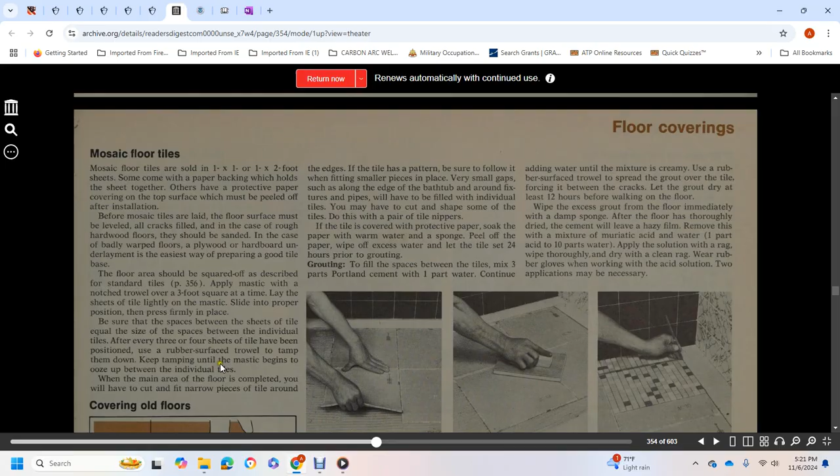Every 3 to 4 sheets of tile, once positioned, should be tamped with a rubber-surfaced trowel to tamp them down. Keep tamping the tile until the mastic begins to ooze up between the individual tiles.

If the tile is covered with protective paper, soak the paper with warm water and a sponge. Peel off the paper, wipe off excess water, and let the tile set 24 hours prior to grouting.

To fill the spaces between the tiles, mix 3 parts Portland cement with 1 part water, continuing to add water until the mixture is creamy. Using a rubber surface trowel, spread the grout over the tile and force it between the cracks. Let the grout dry at least 12 hours before walking on the floor.

Wipe excess grout from the floor immediately with a damp sponge. Once the floor is thoroughly dried, the cement may have a hazy film.

Remove this with a mixture of muriatic acid, 1 part, to 10 parts water. Apply the solution with a rag and wipe thoroughly dry with a clean rag. Wear rubber gloves while working with the acid solution. Two applications may be necessary.

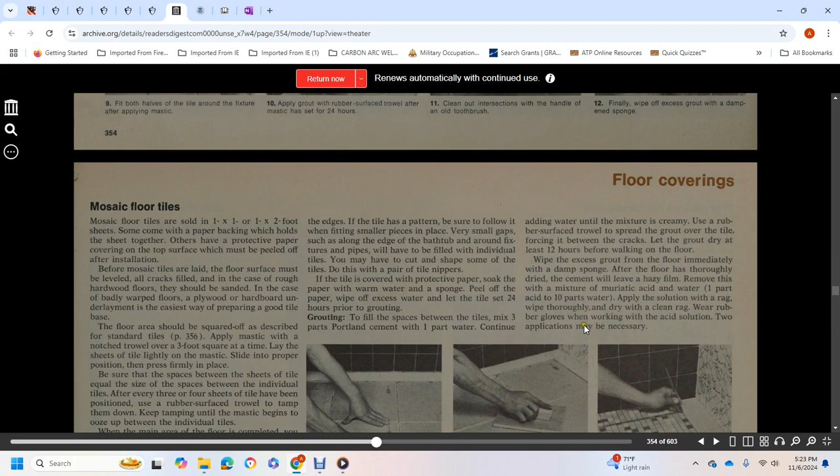Preparation of ceramic tile: lay ceramic tiles so they are square in relation to the doorway that is lined up. The tile runs squarely from the entry toward the back of the room. This is especially important with odd-shaped rooms. Mark a line on the floor at a right angle to the door, running from the center of the door to the back of the room.

Use a squared length of wood, divided into lengths as described in the wall tiling section, as a measuring stick. Floor tiles do not have a spacer lug, so you should allow about 1/16 of an inch gap between the tiles.

Start from the door jamb. First fold the measuring stick to divide the center line into the tile width. You may need to use cut tiles at the far wall, since full tiles rarely fit the length exactly. Mark the point at which the last full tile was laid.

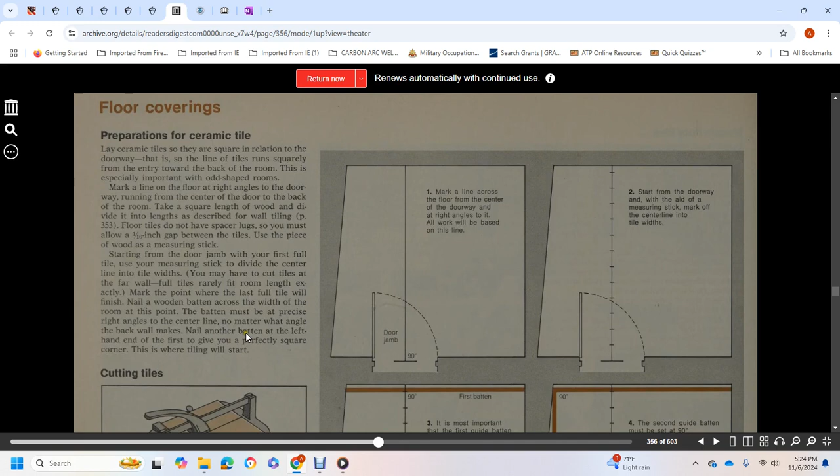Nail the wooden batten across the width of the room. At that point, the batten must be precise, at right angles to the center line. No matter what angle the back wall makes, nail another batten to the left-hand end of the first to give a perfect square corner. This is where the tiling will start.

Laying ceramic floor: ceramic floor tiles are made either as 4-inch squares at 3/8 of an inch thick, or 6-inch squares at 1/2 inch thick. They must have matte glazed surfaces. Unlike wall tiles, they don't have spacer lugs.

Wood floors are the best surface for them. Concrete or brick floors are generally unsuitable for ceramic tiles because they are rarely flat and must be accurately leveled. This leveling job is best left for a professional before tiles can be laid.

Make sure the floor is perfectly flat and firm. Nail down any loose boards and sand the surface if necessary. Very uneven, rough floors should be covered with a hardwood underlayment as another preliminary requirement. Sometimes adjustments will have to be made to the doors to compensate for the thickness of the tiles. Be sure the floor tile mastic lays properly.

Ceramic tile mastic is usually rubber-based and has the needed flexibility to allow movement while the tiles are being set. Apply the mastic according to the directions on the container, using a notched trowel to spread it over a 3-foot square area of floor.

In the corner where you had laid out the battens, press the tiles into the adhesive and insert 1/16 inch spacers between them. When you finish tiling the first section, scrape off the excess adhesive around the tiles, coat the next area, and continue this way until the main floor is complete.

If you find that the rows of tiles are getting closer together or farther apart, it could mean that your battens were not set at exactly a 90-degree angle. Manipulate the tiles so they are even; the flexible mastic permits some adjustment. If you cannot correct it, you will have to take them all up and start over, carefully repositioning all the battens at a correct 90-degree angle.

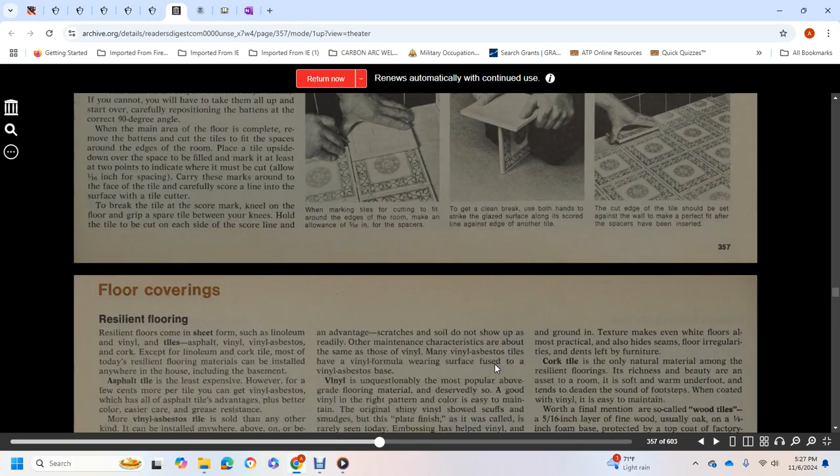Floor coverings, resilient flooring. Resilient flooring comes in sheet form and includes linoleum, vinyl tiles, asphalt tile, vinyl asbestos, and cork. Except for linoleum and cork tile, today's resilient floor tiles can be installed anywhere in the house, including the basement. Asphalt tile is the least expensive, with vinyl asbestos costing a few cents more.

Vinyl asbestos has advantages over asphalt tile, including more color options, easier care, and grease resistance. More vinyl asbestos tile is sold than any other kind, and it can be installed anywhere above or below grade. It does not require waxing or buffing to maintain its sheen.

Vinyl asbestos tiles are made with a mixture of vinyl resins, asbestos fiber, and colors. The gloss is less brilliant than pure vinyl, but this is an advantage since scratches do not show up. Other maintenance characteristics are relatively the same as other vinyl. Vinyl asbestos tiles have a vinyl formula wearing surface fused to the vinyl asbestos base.

Vinyl is unquestionably the most popular of the flooring materials, and deservedly so. A good vinyl in the right pattern and color is easy to maintain. The original shiny vinyl that showed scuffs and smudges, with a plate finish as it was called, is rarely seen today.

Embossing helps vinyl and other tile materials conceal wear marks, with carved, pitted, and fissured grain effects that do more than just look good; they're easier to maintain. Dirt lies loosely in the recesses instead of being walked on and ground in. The texture makes white floors almost practical, and also hides seams, flooring irregularities, and dents left by furniture.

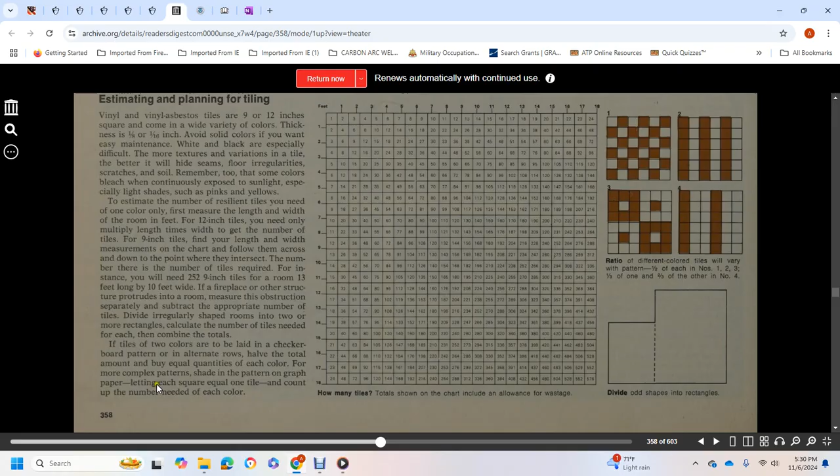If the tiles are of two colors arranged in a checkered pattern or alternate rows, halve the total amount and buy equal quantities of each color. For a more complex pattern, sketch the pattern on graph paper, letting each square equal one tile, and count up the number needed in each color.

Preparation for resilient floor tiling.

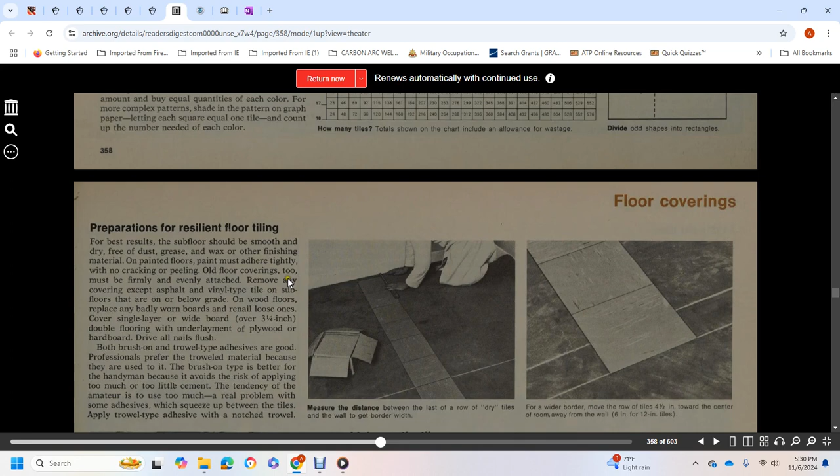For the best results, subfloors should be smooth and dry, free of grease and wax. finishing material. On painted floors, paint must adhere tightly, no cracking or peeling. Old floor covering must be firmly and evenly attached. Remove any loose covering.

Keep asphalt vinyl tile on subfloors that are below grade. On wood floors, replace any badly damaged boards and renail loose ones. Cover single layer wide board over 3 1/4 inches with double flooring. Underlayment of plywood or hardboard hardboard. Drive all nails flush.

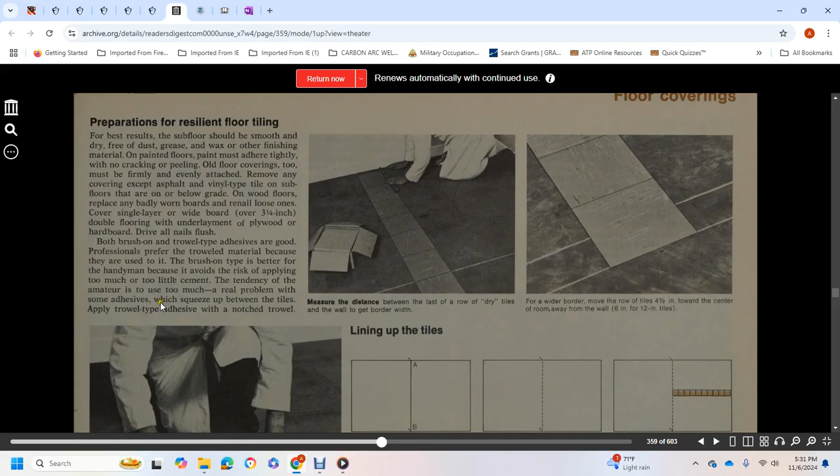Both brush and trowel type adhesive are good. Professionals prefer trowel material because they are used to it. Brush-on type is better for the handyman because it avoids the risk of applying too much or too little cement. The tendency of the amateur is to use too much, causing problems with adhesive squeezing up between the tiles. Apply trowel type adhesive with a notched trowel.

Laying the tiles: tile half of the room at a time. First, spread adhesive over a square yard of the floor on each side of the center line. Place the first two tiles at right angles, aligned with the chalk lines. Work outward on each side to form a pyramid pattern.

Lower the tiles into the adhesive. Do not slide them into place, as this forces the adhesive up. Lay marbleized or grain tiles so that the pattern of the adjacent tile runs in the opposite direction.

Continue spreading adhesive and laying tiles up to the borders. To cut the border tiles, place a dry tile exactly over the adjacent fixed tile, then place another tile on top, flush with the wall.

Score along the inner edge of the top tile, then break along the score so the tile will fit to the wall. Do the same when cutting tile against a door frame.

First, mark the tile where the cutting line starts, then move the tile without turning it to the other side of the door frame, against the other fixed tile. Draw lines at right angles that intersect the first, then cut along the lines up to the intersection with a sharp knife.

Treat more complicated shapes, like a threshold, the same way, using two separate measurements for each surface, with both tiles in position. In the example, the right edge tile is in the first position, with lines drawn on the tile for each surface, A, B, C, and D.

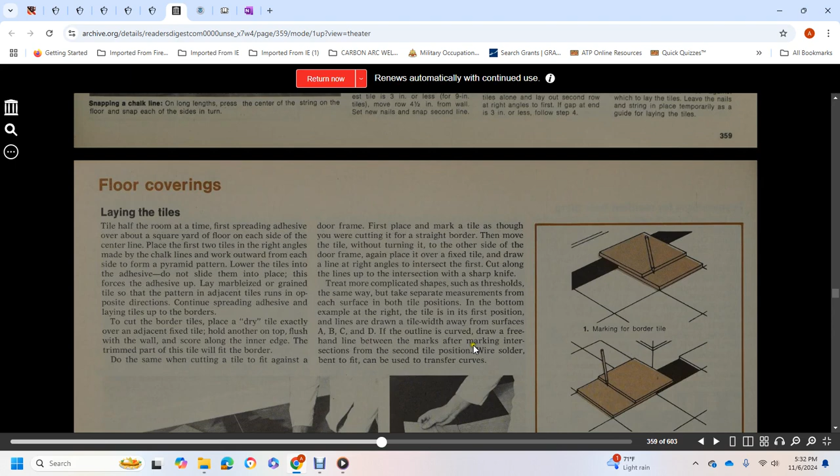If the outline is curved, draw a freehand line, then move the tile's marks after marking the intersection to the second tile position. A wire or solder bent to fit can also be used to transfer the shape.

How to lay sheet vinyl.

Standard sheet flooring is installed permanently with adhesive but is not generally recommended as a do-it-yourself material. Loosely laid vinyl flooring, however, is well within handyman skills.

Most cushion vinyls are available in 6, 9, or 12 foot widths, so seaming is needed only for rooms that are more than 12 feet wide. Match the pattern across the seam, with the second piece of material overlapping along the same edge.

Use the metal straight edge as a guide. Where both pieces of material overlap, a sharp knife is used. Keep the knife vertical, avoiding any leaning to the right or left. Remove the cut off pieces from both the top and bottom.

Next, lay back one piece of the flooring at the seam, drawing a pencil line along the edge of the second piece. Lay back the second piece and spread a 6-inch band of adhesive under the seam, centering on the pencil line.

If the back of the vinyl has been waxed, sand the area lightly. Use a vinyl cement recommended by the flooring manufacturer, then spread it with a notch trowel. Lay the vinyl sheeting onto the wet adhesive and wipe down with a damp cloth to ensure good contact with the adhesive.

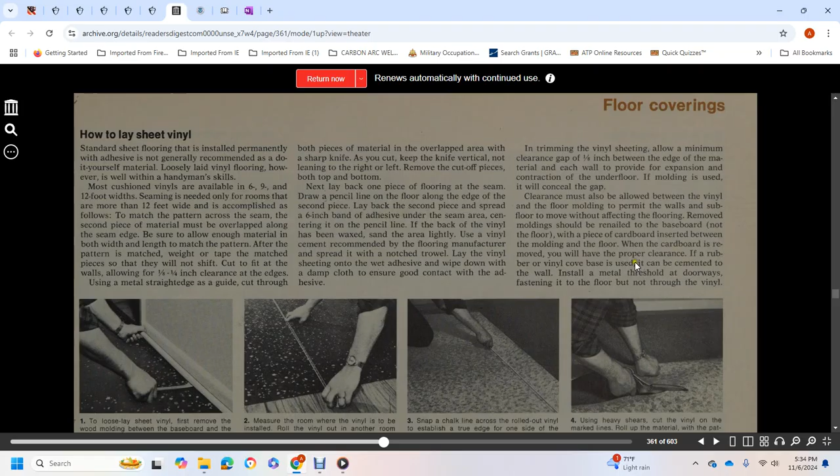Remove the molding and re-nail the baseboard, not into the floor. Place a piece of cardboard inserted between the molding and the floor; the cardboard is removed once you have proper clearance. Rubber vinyl cove base can be used and cemented to the wall.

How to lay a wood floor.

Wood floors are to be secured over the joists, even over concrete. A subfloor is usually used, however, for added strength many today use plywood nailed across the joists, generally covered with a layer of 15-pound asphalt saturated building felt, lapped at 3 inches.

The felt is held in place by the finished floor, typically tongue and groove strip board flooring, the kind most commonly used. It comes pre-finished or unfinished, and is usually laid lengthwise along the room. Take care when laying a wooden floor not to mar the wood, and when hammering, angle the nail at the tongue at a 45-degree angle.

Nail into the subfloor using 2.5-inch steel cut flooring nails. The choice depends on the thickness of the finished floor. Start nailing in the tongue approximately where the shoulder of the tongue comes out. To avoid splitting the tongue, use a nail set, countersinking it at least 1/4 inch or so.

If there's a subfloor, the nails need to go into the joists. Leave a gap of at least 1/4 inch at each side of the room.

Alright, how to lay a wood floor over concrete. A wood floor can be laid over concrete using 2x4 screeds, short lengths to which the flooring can be nailed, using random lengths of 18 to 48 inches of 2x6 or 2x8 pieces along the walls.

Screeds are set with mastic about 1/8 of an inch thick, spread over the whole floor. Adhesive is applied only under the screeds, spread 1/4 inch thick. Compression by the screeds causes it to spread further.

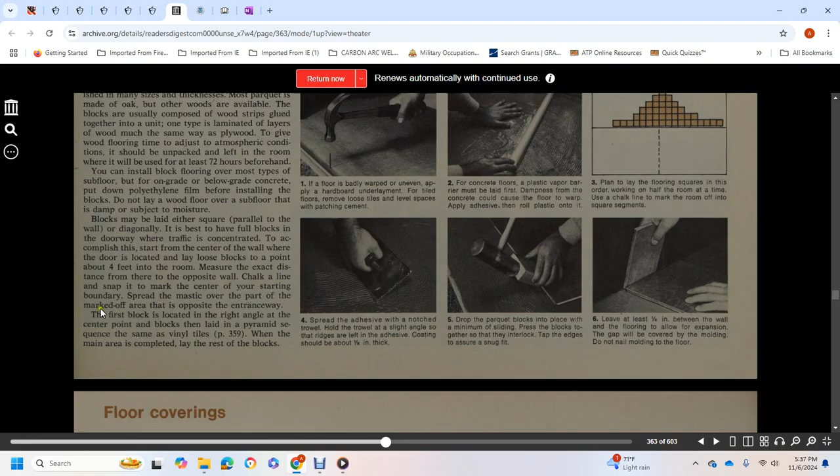Blocks may be laid either square parallel to the wall or diagonally. It's best to have full blocks in the doorway where traffic is concentrated. To accomplish this, start with the center wall where the door is located. Lay loose blocks to a point about 4 feet into the room. Measure the exact distance from the opposite wall, chalk a line and snap it. Mark the center of the starting boundary. Spread the mastic over the marked off area opposite the entranceway. Place the first block at a right angle with the center point, following a pyramid sequence, same as vinyl tiles.

Now, laying slate tiles. Slate tiles are particularly good for flooring because they are unaffected by water and dirt. They seldom need polishing, with occasional damp wiping usually sufficient. Slate tiles are like fine garden walking paths leading to front entrances.

Slate can be laid over sound wood, concrete, or composition floors. Loose boards should be nailed down tight. Clean up the areas to be tiled, removing all wax, grease, and loose paint. Lay tiles outdoors over a concrete base at least 4 inches thick. A dry run is advisable before laying the tiles.

Slate tiles are sold at masonry supply dealers, loose in packages, usually enough in a carton to cover 10 square feet. Tiles can be random colors, or you can specify one color and a thickness of 1/4 inch or 1/2 inch. Tiles can be in an irregular flagstone pattern or in rectangles, squares, or ashlar.

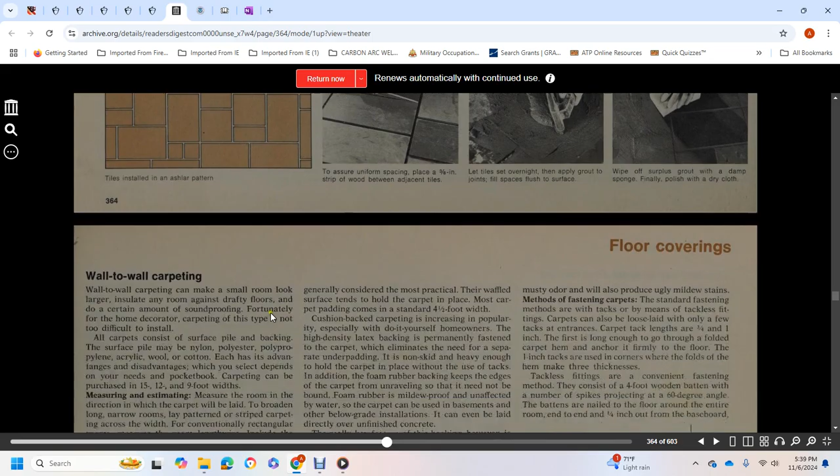Wall-to-wall carpeting can make a small room look larger, insulate any room with drafty floors, and provide a certain amount of soundproofing. Fortunately, in home decorating, this type of carpeting is not too difficult to install. All carpets consist of a surface pile with backing; the surface pile can be nylon, polyester, polypropylene, acrylic, wool, or cotton. Each has advantages and disadvantages, and your selection depends on your needs and pocketbook.

Carpeting can be purchased in 15, 12, or 9 foot widths. To measure and estimate, measure the room in the direction the carpet will be laid - to broaden long, narrow rooms, lay patterned or striped of carpeting across the width. For a conventional rectangular room, measure the room lengthwise, including the full width of door frames, and extend the carpet slightly into the adjoining room.

Most wall-to-wall carpeting is priced by the square yard. Determine how many square yards you need by multiplying the length and width of the room in feet, then dividing the result by 9.

Choosing a padding is essential, except for so-called one-piece cushion-backed carpeting with built-in underlay padding. Good carpet insulation prolongs the life of the carpeting, increases its soundproofing capacity, and adds underfoot comfort. The most common types of carpet padding are latex rubber sponge, rubber foam, soft and hard vinyl foams, and felted cushion made either entirely of animal hair or a combination of hair and jute. Of these, latex vinyl foams are generally considered most practical, with a waffle surface that tends to hold the carpet in place.

Most carpet padding comes in a standard 4.5 foot width. Cushion-backed carpeting is increasing in popularity, especially with do-it-yourself homeowners. Its latex backing is permanently fastened to the carpet, eliminating the need for separate underpadding, and is non-skidding and heavy enough to hold the carpet in place. The foam rubber backing also keeps the edges of the carpet from unraveling, so it need not be bound.

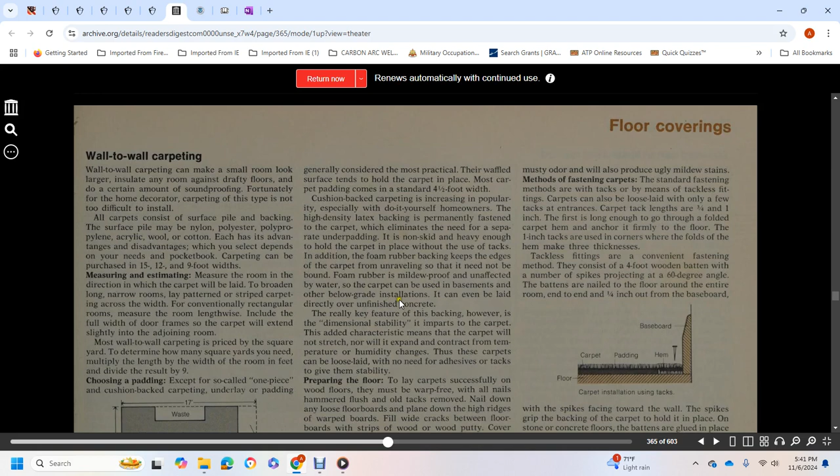Foam rubbering is mildew-proof and unaffected by water, so the carpet can be used in basements or other below-grade installations, even laid directly over unfinished concrete. The real key feature of this backing, however, is dimensional stability. With this characteristic, the carpet will not stretch, nor will it expand or contract with temperature or humidity changes. These carpets can be loose-laid, needing no adhesive or tacks to give them stability.

Preparing the floor: to lay carpet successfully over a wooden floor, it must be warp-free, with all nails hammered flush and old tacks removed. Loose floorboards should be nailed down, and high ridges or warped boards should be planed down. Fill wide cracks between floorboards with wood strips and wood putty. Cover floors with warps or cracks beyond reasonable repair with hardboard or plywood.

Stone or concrete floors with surface ridges or cracks should be treated beforehand with floor leveling compound in order to reduce carpet wear. Liquid compounds are usually useful for sealing and surfacing dusty, powdery floors - a thin layer of compound is floated over the floor to keep dust from working its way up into the underlay and carpet pile.

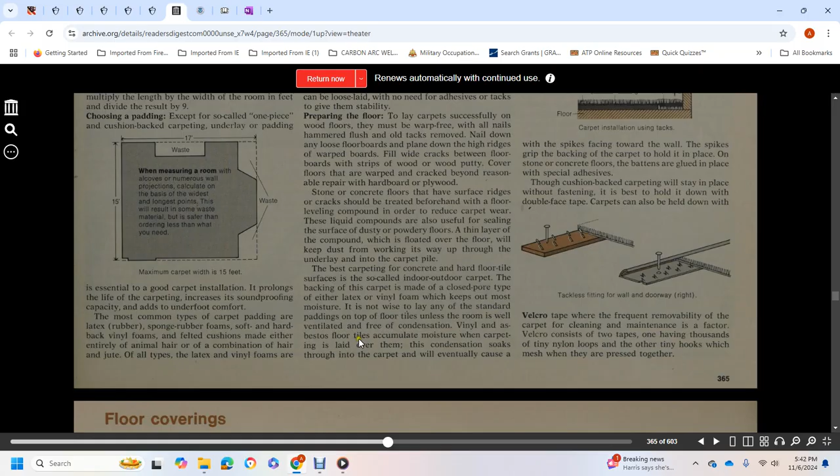Best carpeting for a concrete hard floor tile surface is so-called indoor-outdoor carpet. The backing is made with a closed pore type, either latex or vinyl foam, which keeps out moisture. It's not wise to lay standard padding on floor tiles unless the room is well ventilated and free of condensation. Vinyl asbestos floor tiles accumulate moisture when carpeting is laid over them. The condensation soaks through the carpet and will eventually cause musty odor and ugly mildew stains.

Methods to fasten carpet cover the standard fastening methods: tacks and tackless fittings made with tackless fittings. Carpeting can also be loose laid with only a few tacks at the entrance. Carpet tack lengths are 3/4 inch and 1 inch. The first length should be long enough to hold the folded carpet hem and anchor it firmly in place to the floor. 1 inch tacks are used in the corners where the folds of the hem make 3 thicknesses.

The tackless fittings, a convenient fastening method, consist of a 4-foot wooden batten with a number of spikes at a 60-degree angle. The battens are nailed to the floor around the entire room, 1/4 inch out from the baseboard, with the spikes facing toward the wall. The spikes grip the backing of the carpet to hold it in place. On stone or concrete floors, battens are glued in place with special adhesive.

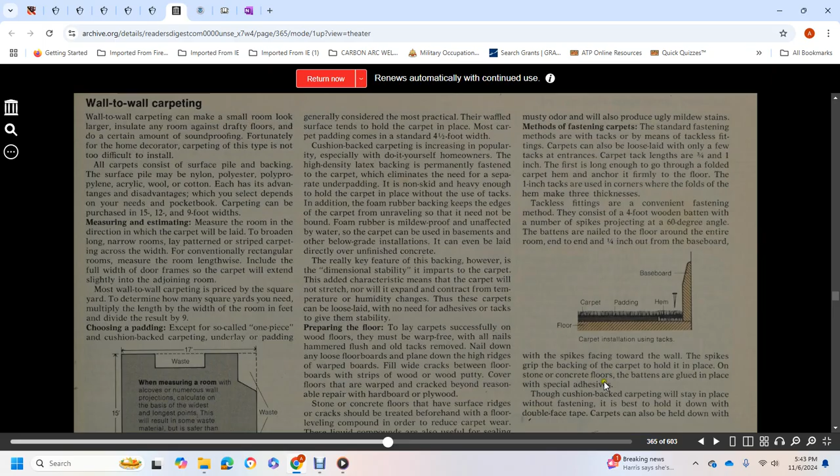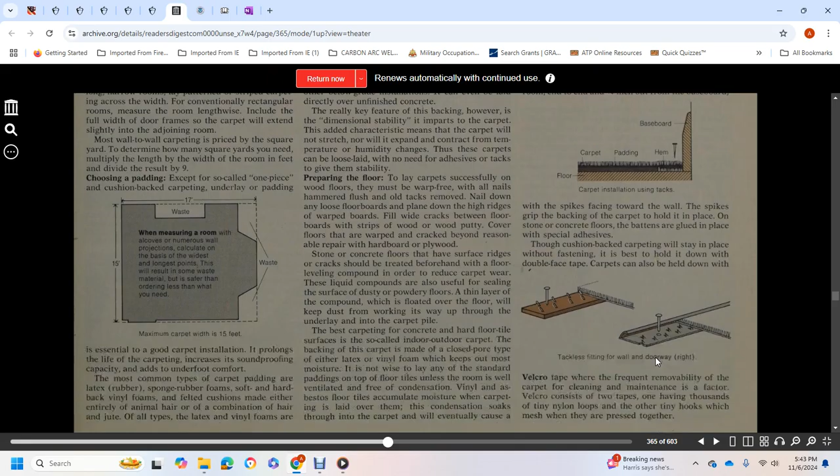Cushion back carpeting stays in place without fastening, and it's best to hold it down with double-faced tape. Carpets can also be held with Velcro tape for frequent removability of the carpet. The Velcro cleaning maintenance system consists of two tapes having thousands of tiny nylon loops and other tiny hooks which mesh together when pressed.

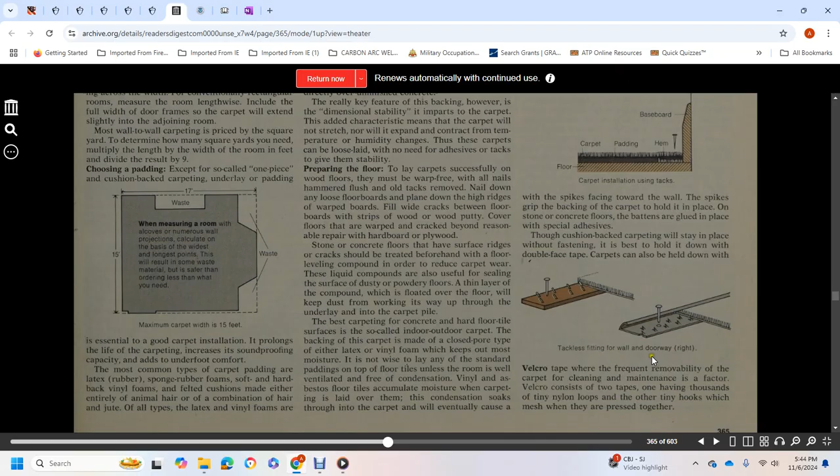This shows the tackless fitting at the wall doorway, and shows the carpet installation, floor carpet padding, hem, and baseboard.

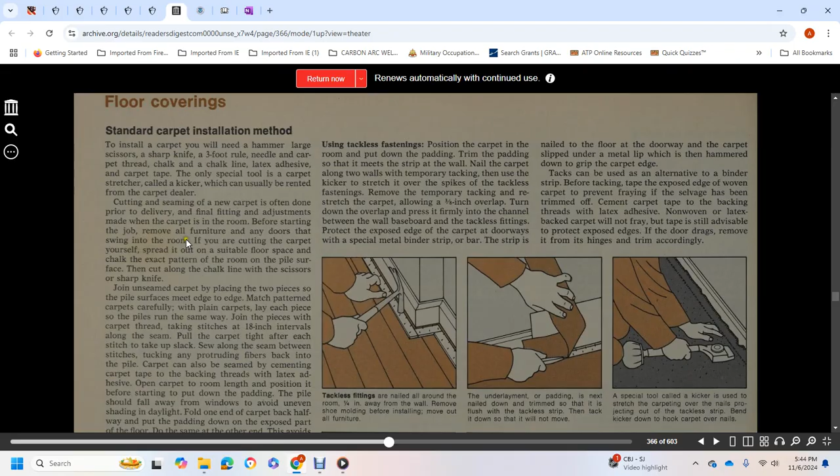Cutting and seaming the new carpet is often done prior to delivery, with final fitting adjustments made when the carpet is brought into the room. Before starting, remove all the furniture and any doors swinging into the room. If you're cutting the carpet yourself, spread it out on a suitable floor space and chalk the exact pattern of the room on the pile surface.

Cut along the chalk line with scissors or a sharp knife. Join and seam the carpet by placing two pieces with the pile surfaces meeting edge to edge. Match the pattern carefully when seaming, and lay each piece so the piles run the same way. Join the pieces with carpet thread.

Take stitches at 18-inch intervals along the seam. Pull the carpet tight after each stitch to take up the slack. Sew along the seam between the stitches, tucking the protruding fibers back into the pile.

Carpet may also be seamed using cementing carpet tape, bonding the backing threads with latex adhesive to the carpet. First, open the carpet to room length and position it before starting to put down the padding. The pile should fall away from the windows to avoid uneven shading in the daylight.

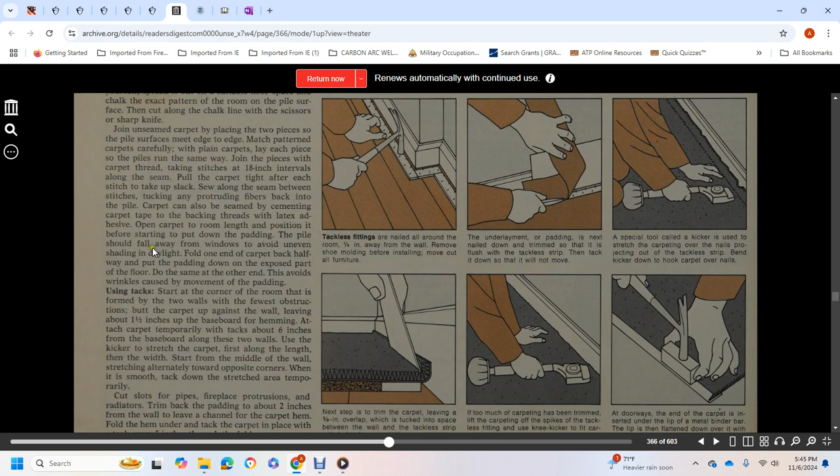Fold one end of the carpet back halfway and put the pad down on the exposed part of the floor. Do the same at the other end, to avoid wrinkles caused by movement of the padding.

Use the kicker to stretch the carpet, first along the length, then the width, starting at the middle of the wall and stretching alternately toward the opposite corner. When smooth, tack down the stretched carpet temporarily.

Cut slots for pipes, at fireplace protrusions and radiators. Trim back padding at least 2 inches from the wall to leave the channel for the carpet hem.

Fold the hem under the tack carpet and place tacks every 5 inches from the fold. Using tackless fastenings, position the carpet in the room and put it down with the padding.

Trim the padding to meet the strip at the wall, nail the carpet along two walls with temporary tacking, then lift with the kicker and stretch it over the spikes of the tackless fastenings.

Remove the temporary tacking, restretch the carpet allowing a 3/8 inch overlap, turn down the overlap, and press it firmly into the channel between the wall base and the tackless fitting.

Protect the exposed edge of the carpet at doorways with a special metal binder strip or bar. This strip nails to the floor of the doorway; slide the carpet under the metal lip and hammer it down to grab the carpet edge.

Tacks can alternatively be used instead of a binder strip before tacking. Tape the exposed edge of woven carpet to prevent fraying of the selvage.

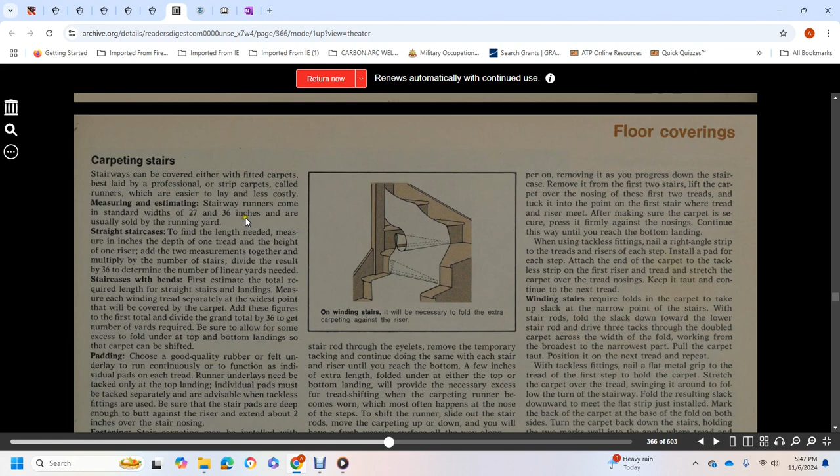Measuring estimates: stairway runners are standard widths of 27 and 36 inches and are usually sold by the running yard.

For a straight staircase, find the length needed by measuring the depth of one tread and the height of one riser, adding these two measurements together, multiplying by the number of stairs, then dividing the result by 36 to determine the linear yards needed.

For a staircase with bends, first estimate the total required length of the straight stairs and landing, then measure each winding tread separately at its widest point, which will be covered with carpet.

Add these figures together for the grand total, then divide by 36 to give the number of yards required. Be sure to allow some excess to fold under at the top and bottom landings in case the carpet needs to be shifted.

Padding should be a good quality rubber or felt underlay run continuously up the staircase.

Be sure the stair pads are deep enough to butt against the riser and extend about 2 inches over the stair nose.

Stair carpeting may be fastened with tacks, tackless fittings, double-face tape, or stair rods, metal rods that slide through eyelets screwed at the bottom of each stair riser.

The tape is placed on both sides of the intersection between the riser and tread. Over the tread nosing, tackless fittings use metal strips that nail at the bottom of the tread where it meets the riser, with metal teeth biting into the carpet to hold it firm.

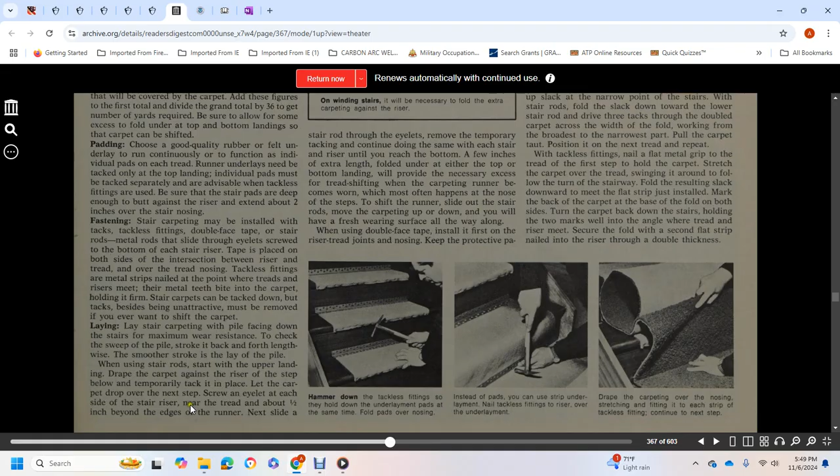Screw in an eyelet on each side of the stair riser, near the tread, about 1/2 inch beyond the edge of the runner.

Next, slide a stair rod through the eyelets, removing the temporary tack, and continue the same process down each stairway.

Continue until reaching the bottom, leaving a few inches of extra length folded under either the top or bottom landing for shifting the carpet runner as necessary, since wear most often happens at the nose of the steps.

When using tackless fittings, nail a right angle strip to the treads and risers at each step, install the pad at each step, and attach the end of the carpet to the tackless strip at the first riser and tread. Stretch the carpet over the tread nose and keep it taut, continuing to the next tread.

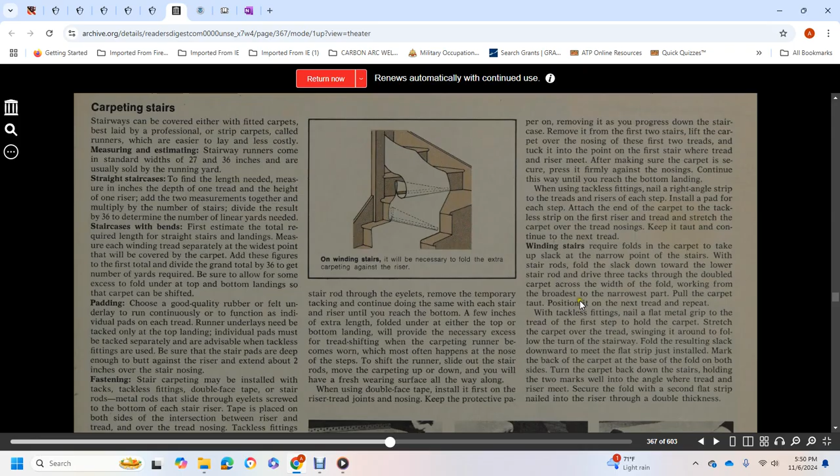Winding stairs require folding the carpet to take up the slack at the narrow point with the stair rods, folding the slack down toward the lower stair. Drive three tacks through the double thickness of carpet across the width of the fold, working from the broadest to the narrowest part of the fold, positioning the next tread as required.

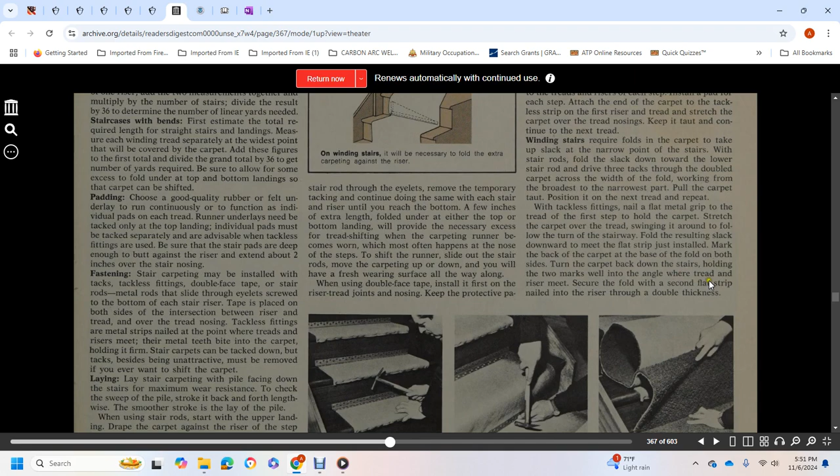With tackless fittings, nailing the flat metal grip strip to the tread at the first step. Hold the carpet and stretch it over the tread, swinging it around the following turn of the stairway. Fold the resulting slack downward to meet the flat strip just installed, and mark the back of the carpet at the base of the fold on both sides. Turn the carpet back down on the stairs, holding the two marks at the angle where the tread and riser meet. Fold the carpet to the strip and nail the second flat strip within the riser through the double thickness.

Cushion back carpeting may be limited, and when strips are used separately, padding is not needed, although these instructions suit most carpeting. Read the manufacturer's instructions for any deviation in technique.

To install cushion carpet, a 2-inch wide double face tape is applied flush with the wall around the entire room. The carpet is rolled out, the protective paper is removed from the tape, and the carpet is pressed down firmly over the tape. A metal binder strip is generally used at doorways.

Most cushion back carpeting comes in 12 to 15 foot widths for your room. When a wider extra strip must be added, you will need 5-inch wide seam tape, seam activator, and a straight edge with a long metal guide. All of these items can be purchased from your carpet dealer, and he can tell you where to buy them.

On wood floors, make the seam perpendicular to the direction of the floorboards to prevent shading at the seam position. The second piece's nap runs in the same direction as the first. If edges are not straight, they must be trimmed before seaming. Using a straight edge guide, mark the floor with a soft pencil.

Hold both carpet lengths an eighth of an inch apart, then peel the paper from the tape. Apply the tape activator and press the carpet down until the tape becomes slightly tacky, securing the first length to the tape.